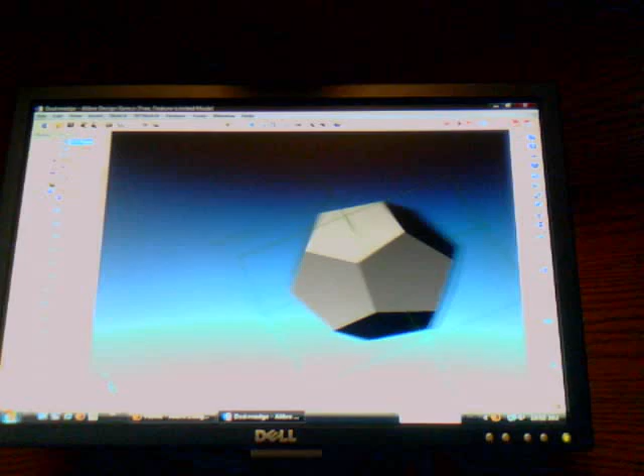Hello, this is my second video on how to build a gigaminx. Right now we're going to build the middle edge. On a 5x5, this would be the piece that touches the center the most.

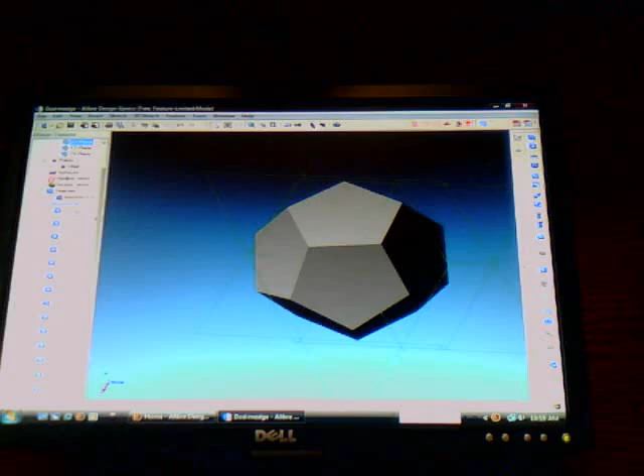We're going to start off kind of the same way we started on the other one. We're going to import our IGS dodecahedron. If you have not seen my other video, I strongly advise that you see it first. After that, we're going to start cutting into it the same way, with the suppress piece and everything.

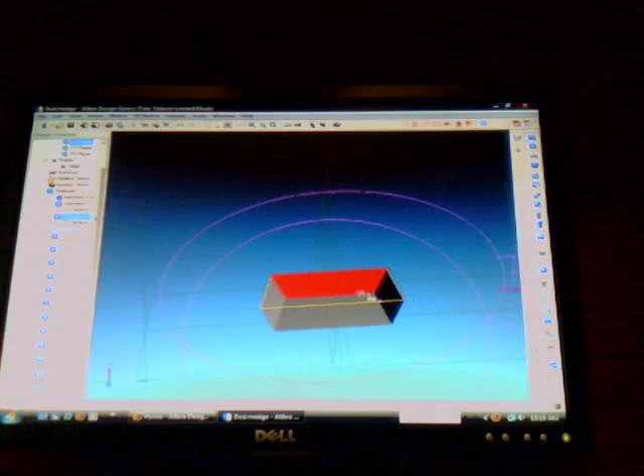Instead of leaving the center, we're going to cut in this way, suppress it like we did on the dodecahedron, and cut away everything else. So we're just left with this little piece that's the 17.03, I think, units.

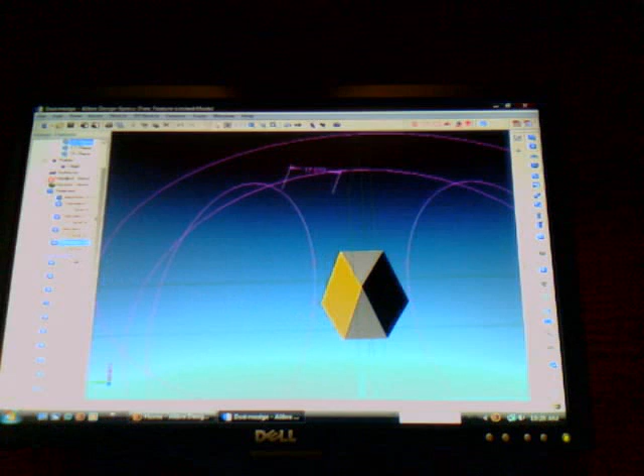For all the rest of the pieces, this is the only thing you need. You do not need the whole dodecahedron. Next, I'm going to cut in here, same thing on the other side, and then that way, and then up, leaving this piece that directly touches the centerpiece, right here.

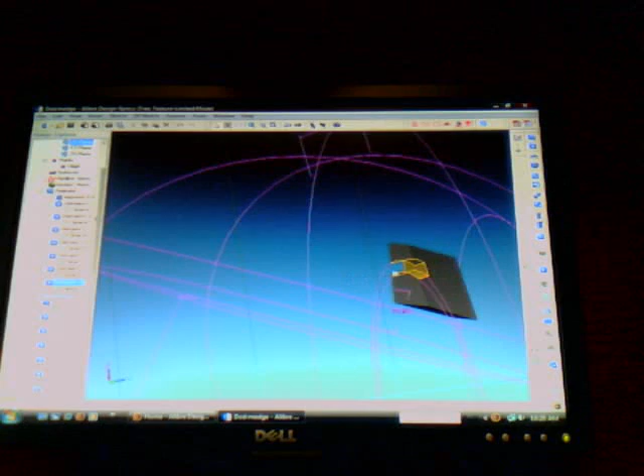Next, I am going to insert the inner rail, and this is a cut extrude instead of an extrude boss, because this has to hook onto it, not come out of it. We'll have one though that does come out of this piece.

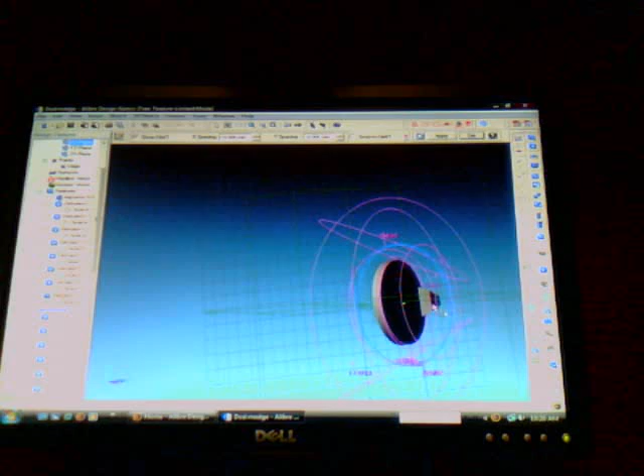Next we start with the tongue that catches under the centerpiece, and I made a sketch on this, as shown right here. It's the big circle, and it lines up perfectly with this face, and I extruded all of this material over here. Then I do the same thing on this face and that face.

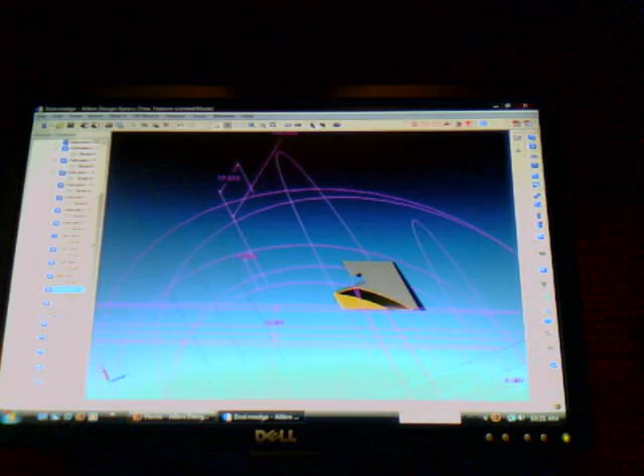Now we have our tongue and our rail that sticks under the centerpiece. Then we cut into it, and this will hold the support kind of for all the other pieces. This is what they touch, and I don't really know how to explain it. We do it on both sides, leaving just this little bit right there.

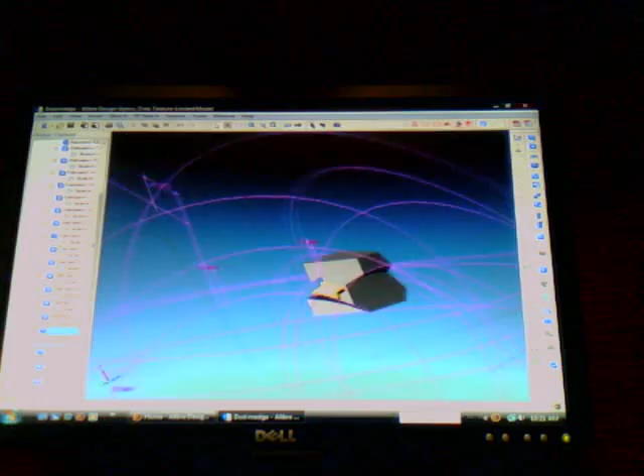Then we cut in this way, and that's going to hold the edge piece that fits between here and another one of those down here. So then I pulled this design out. I can't really remember how I designed it, so I can't tell you how I got that weird shape.

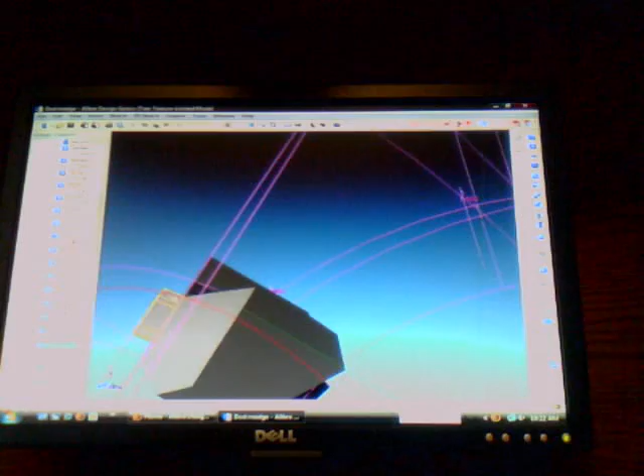I do the same thing on the other side. Since that isn't straight - well, actually that's a curved line, but since it doesn't keep going with it, it turns, and it's going to catch some of the pieces, so we have to pull it out like that. Now the pieces can glide over it. We cut into there, and same thing on this side, because without that they stick out a little bit.

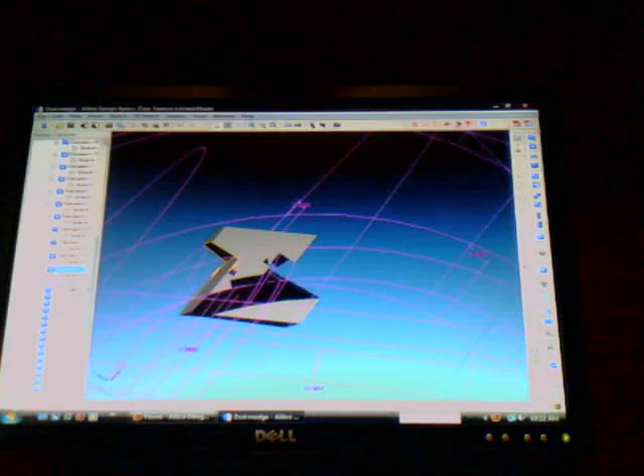I really don't remember why I left that, why I didn't do that there. I think I might redesign this to make that look a little better. But then we go back to the fillets, and the fillets are just a pain on this one. That's all I can say about it.

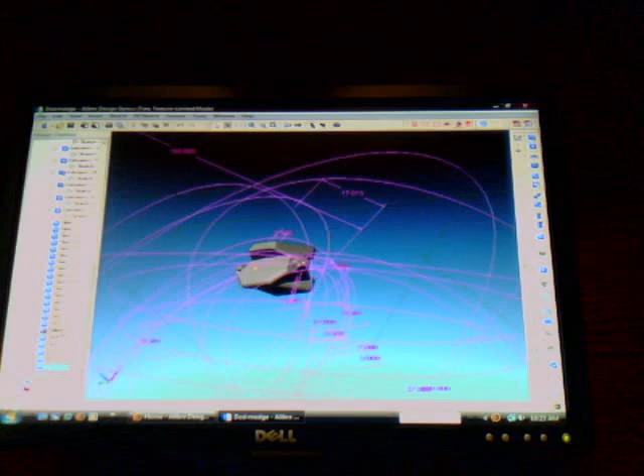Yet again, another error on the fillets. Right here I have no edge specified. I should have an edge specified though. I do not know how that happened. So you just have to fix it, and again, this top part up here is what's touching on the outside.

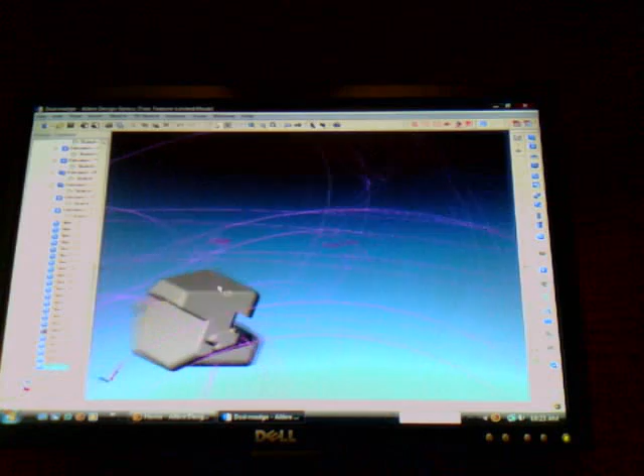So I made sure that everything was 1 millimeter. Well, at first I had it at 1.5 millimeters. I thank Drew from twistypuzzles.com for telling me to bump it down to 1 millimeter.

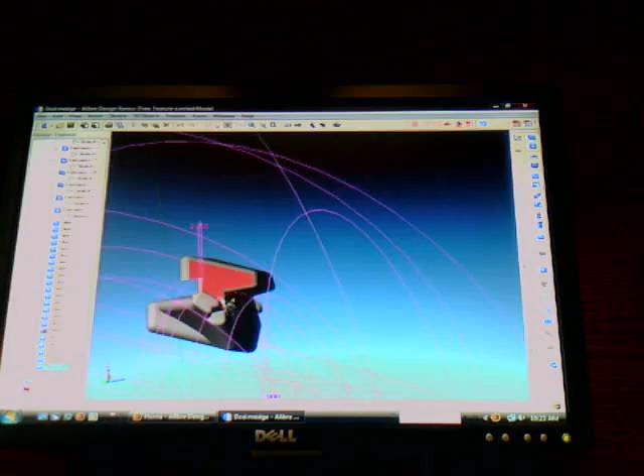On the other one, this is extruded to catch underneath the centerpiece, and it's extruded 5 millimeters. But on this design, 5 millimeters brings that yellow face to like right where my mouse is, and that's way too skinny. So this is 3.5 millimeters, which I think is enough, especially with the V cube design right there.

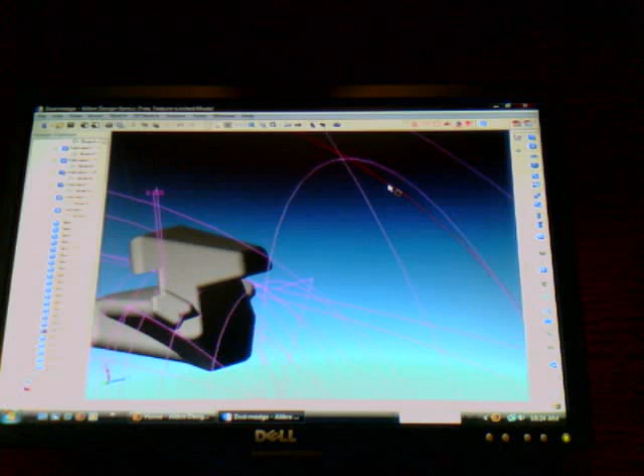So thank you for watching my how to build the center edge piece of a gigaminx.